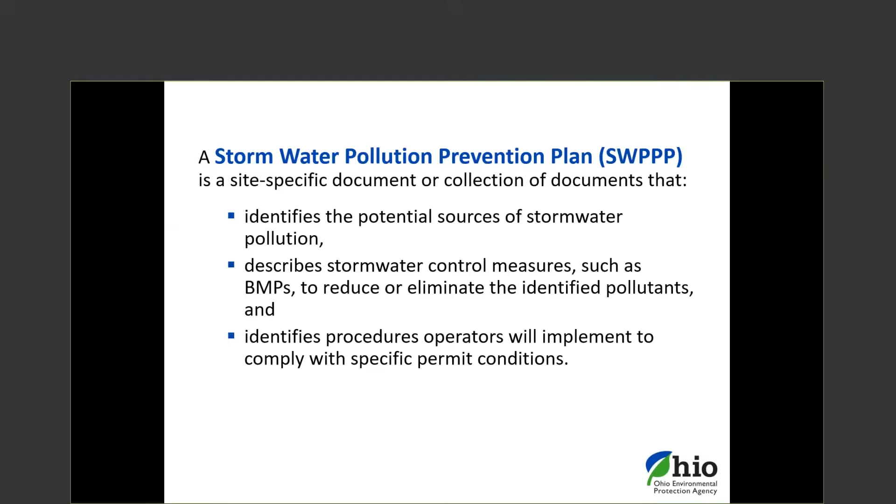But what I want to talk about today is a little bit more detail and think a little bit further about a SWPPP. And it can be a lot more than just that. A SWPPP is a couple of items here. A communication tool, maybe first and foremost. That can be a challenge because it's communicating many things to many folks, as we'll see. It's a thought process or an exercise. Okay, so there's a whole process that goes on through the development and eventually review of a SWPPP.

A SWPPP needs to be executable. It needs to be doable. It needs to relay the proper information so that the expectations can be met, costs can be estimated and accrued for properly by the contractor or the people doing the sediment and erosion control work on the project. Everybody knows who's responsible when throughout the project to save problems from occurring down the road during construction.

And the last two points here are sort of intertwined in that it's a very different, unique type of document. It's very complex. It includes a lot of different media: narrative, drawings, calculations, forms, etc. And not only is the SWPPP its own document, but it's very much integrated with other documents, especially the contract plans, drawings, and specifications for the project, but possibly other documents as well that all become integrated and maybe even borrow from each other.

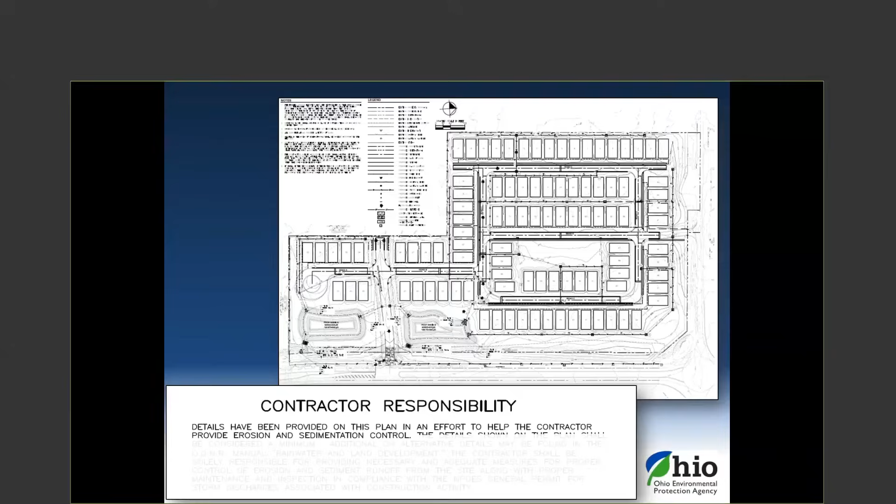So really, a SWPPP also is very specific and directive. It should really state exactly what is to be done, when, where, and how with regards to preventing those pollutant discharges. Now, that doesn't mean to say it's a finite document. It does change as construction things happen. There are certain unknowns.

But as a very simplistic example, there's not necessarily liability involved there; a contractor can't be told when to take the trash out, so to speak. But the SWPPP can identify that a dumpster is required on site and where it is to be located in an area that would not result in a discharge.

So again, that's sort of a simplistic example, but demonstrates where there's a little bit of direct direction that's required. But it also isn't really super specific in the sense that it assumes a lot of the liability for what happens on the job site.

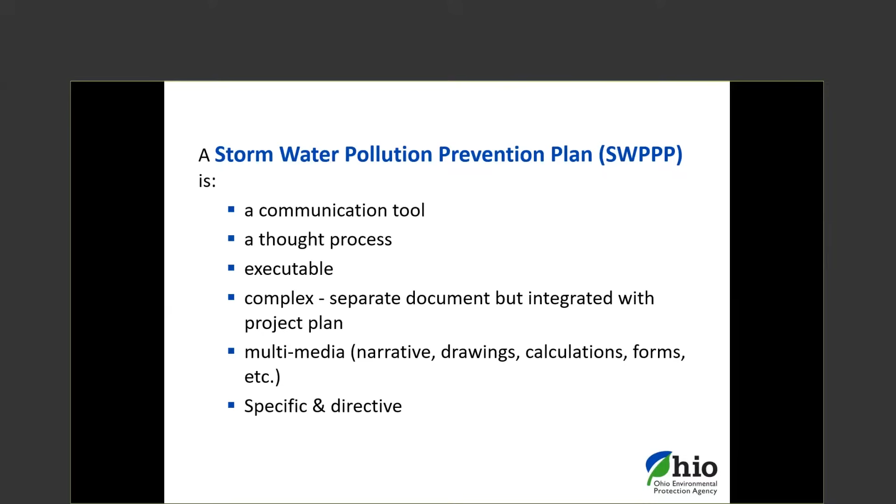So keeping those things in mind, the next step in the SWPPP is looking at the details of it, what goes into a SWPPP. And I don't want to spend a lot of time on this. All of the details are fairly clearly spelled out in the construction general permit. There's 19 pages of description of what goes into a SWPPP and how to do it in various levels of detail. It should be fairly clear as far as that goes.

But what I want to mention there is the fact that this is where it ties into the thought process. A lot of these items are listed as almost a reminder or a question as to bringing up topics that may or may not come into play as we develop a SWPPP and look at the potential discharges that occur. There are a lot of items in those 19 pages because this general permit is addressing all types of construction, various sizes and levels and degrees of projects. So it is very long and tedious.

There's a lot of little descriptions in there, but these items aren't necessarily anything in and of themselves if they're not used properly. Identifying the soil on a construction site doesn't help if we don't understand, is that soil erodible or resistant to erosion? What does all that mean when we look those characteristics up? Does it require me to do something different, more or less, than I would on any other given site? So that's why I like to think of it as a thought process.

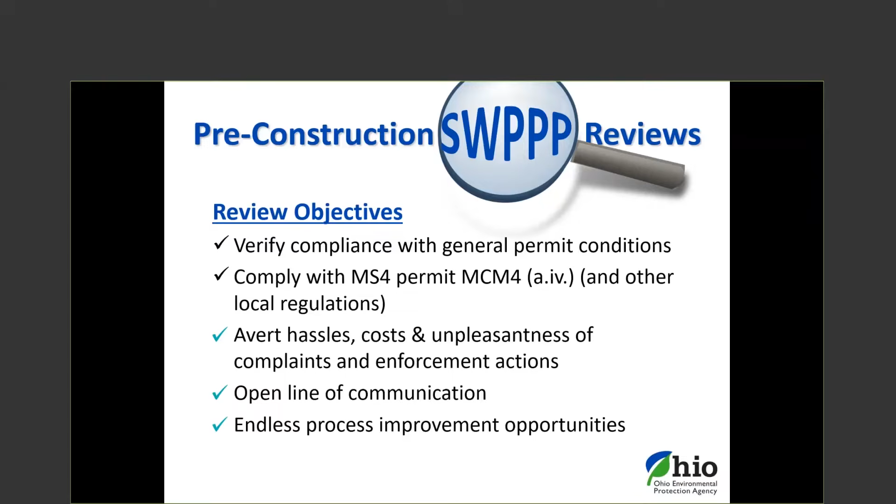Okay, so switching gears, let's talk a little bit about an approach to reviewing a SWPPP. No flow charts here, no step-by-step process if that's what you're looking for, just big picture thinking to set the stage for you to develop a review process of your own. And that's going to be flexible based on a number of things: local requirements, types of projects you're seeing, amount of projects you're seeing, staff, et cetera.

I think the first thing we need to get our heads around as a reviewer is that everything with a project needs to be done at a certain time, a certain sequence, under certain circumstances, schedules, et cetera. So we need to be thinking in terms of chronology here. Seasonally, too, things change. Obviously, weather, sediment, and erosion control concerns change along with the seasons. That means we need to look at that project in steps, where, as I mentioned earlier, most of our efforts go towards the final product, the end building. The SWPPP is really aimed at the construction process.

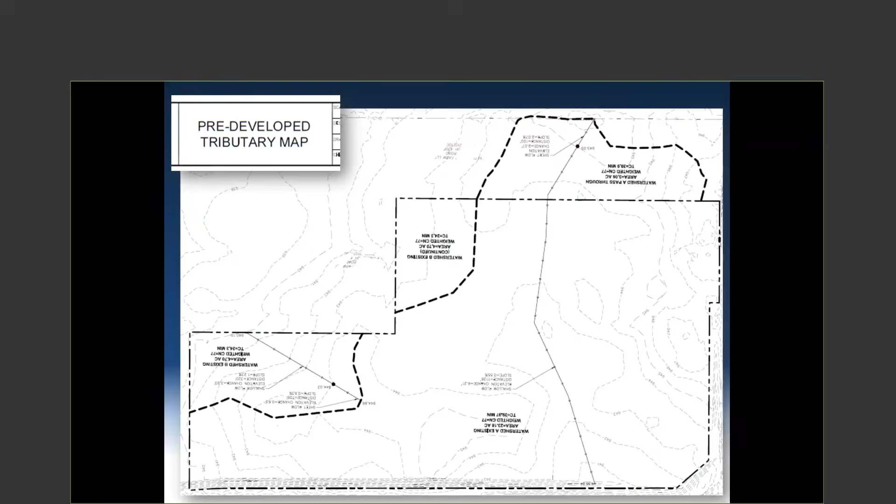So we need to know before the shovel even hits the ground, what does our site look like? What do we have there? That will help lead us into what controls we're probably going to need. So in this case, I've got an existing site map, very essential to me being able to plan a SWPPP, with existing drainage areas, existing conditions as far as streams and land cover go, assuming that most of this is going to be disturbed, graded, filled, cut, and altered in some way that's going to require SWPPP controls. I can determine where my drainage areas are, and that's going to lead to a lot of the placement of various practices.

So I should have a SWPPP plan for that setting, that initial phase where a lot of my sediment discharge is probably going to be at its worst, the clearing and grubbing phase, the rough grading phases of construction, as you see here.

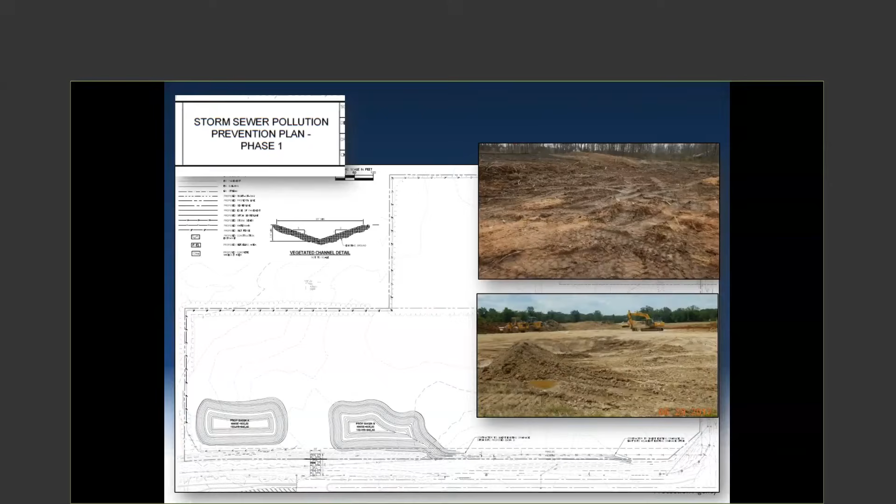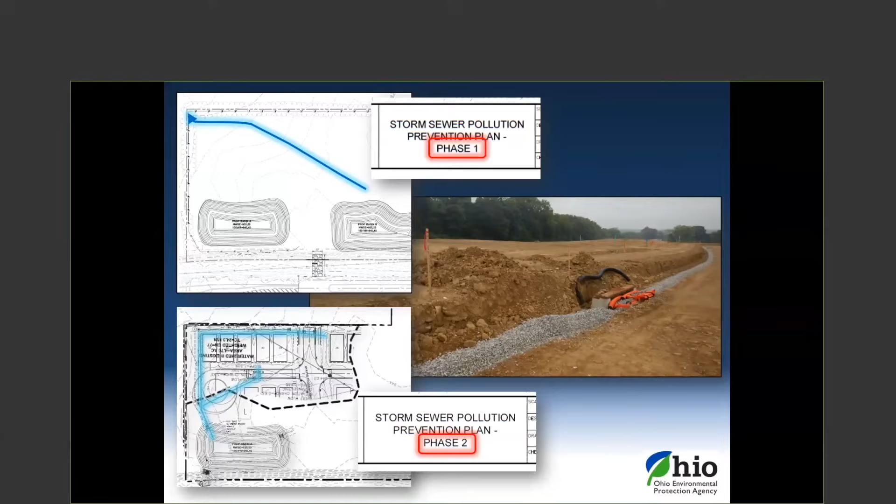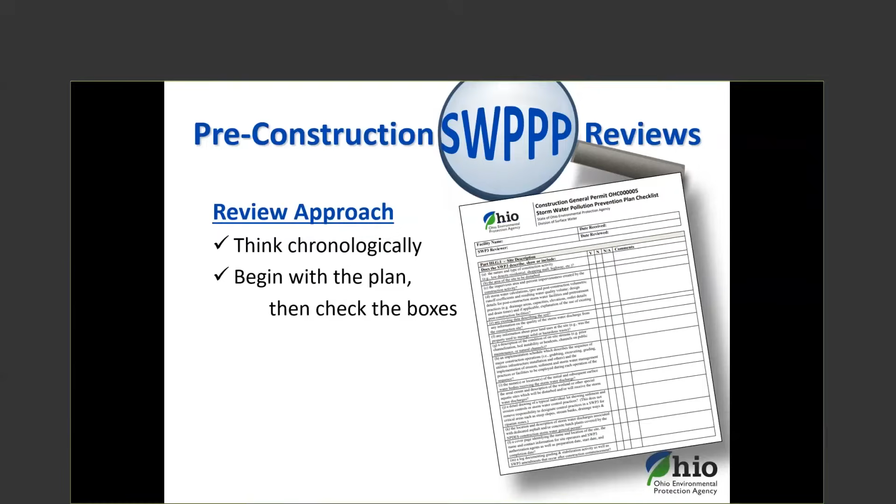I also need to be thinking about the plan, not start with the checklist. So we do have a checklist that really just cut and paste all the different criteria out of the permit to make your review easy. It's great for documenting the review and really a necessity for documenting that you've done the review, but it doesn't necessarily walk you through the project in the best manner. I like to begin with the actual plan itself.

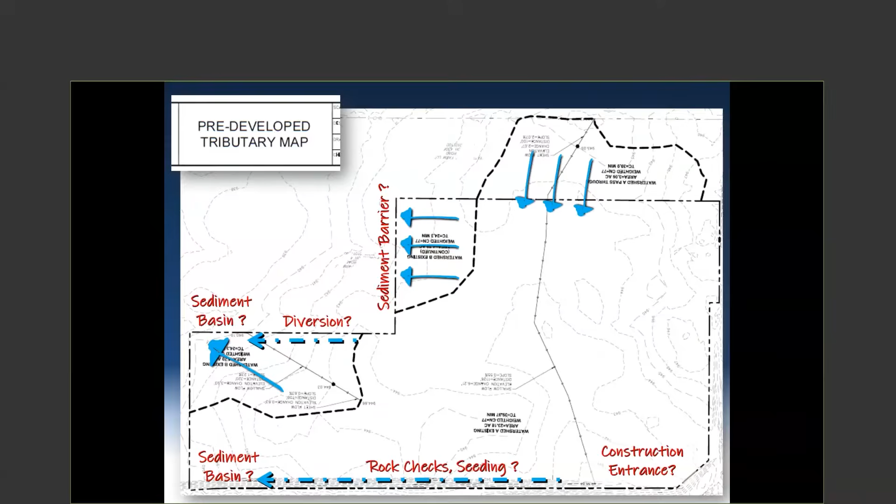So then I can go look into the SWPPP plan and start to see, okay, they do have basins right where I thought they would be. They do have perimeter controls right where I thought they would be. Maybe where I show the question mark, I thought there would be one and there's not. That forces me to ask more questions. Maybe it's not the right control.

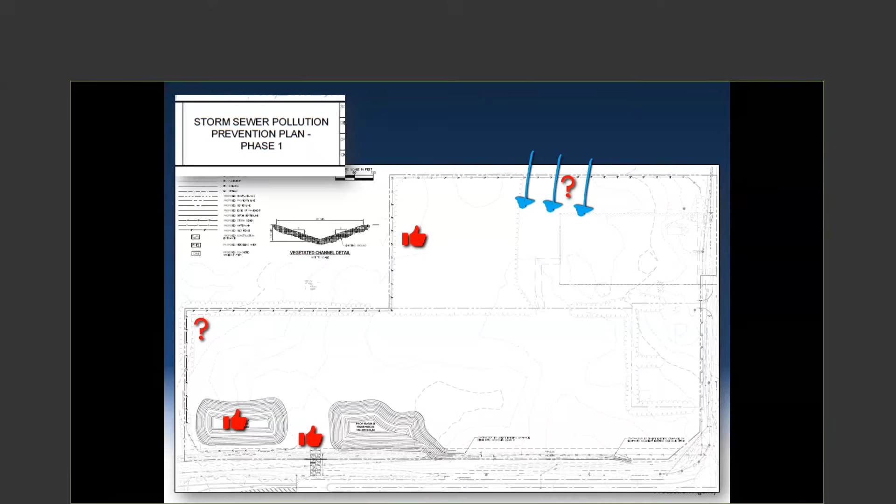Maybe it is. On the north side of the drawing, I've got off-site discharge coming on through a silt fence. Is that concentrated flow? Is that going to be a problem? May or may not be, but at least it identifies the question that may need to be asked to the developer to get more information.

We move to subsequent phases of the project. So now I've got infrastructure installed. I can start to look at those types of BMPs that go in. Inlets. I've got an inlet shown here in a backyard. Is this area going to be stabilized? Is it going to have inlet protection on it? Is it subject to a lot of sediment runoff from that area that may not be stabilized?

To the northeast, there's a street end for a stub right next to a catch basin shown there. That's a popular place to do things like concrete washouts. Is that going to be too close to that inlet? Is that going to be a problem? Are the washouts shown somewhere else on the plan?

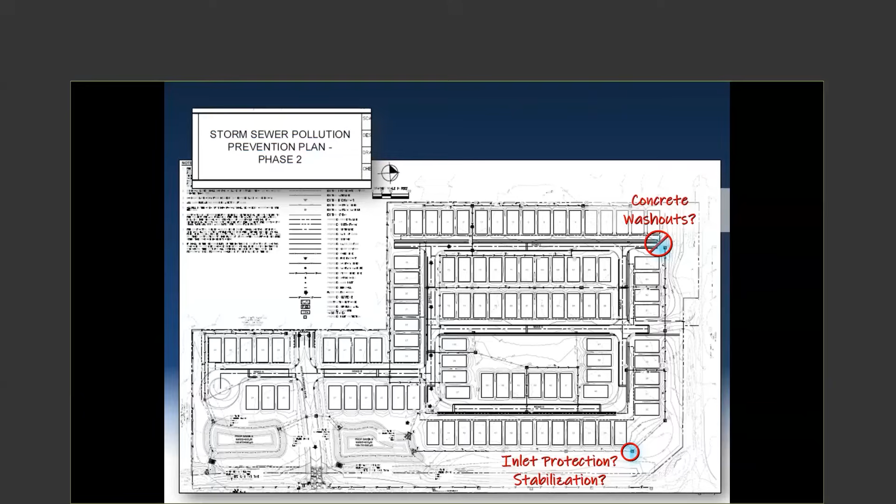Those are just questions to ask. It may or may not be answered in the plan. You may need to get more information. You may need to correct things. But those are the types of questions that you can start to ask when you're really looking at the plan and not simply checking off the boxes.

And then finally, the last segment of a lot of construction or residential construction, individual lots. Do I have a control plan for the individual lot? Probably a typical. Has it addressed all the issues? The one I've shown here, I've checked through the boxes, but it doesn't list a concrete washout basin. Will there be concrete work? There's likely to be some at some point.

Is it going to be a community basin? That goes kind of back to my previous question, makes it maybe more important that the location, if it's going to be communal at one of those street stubs, is not going to be a problem. It's going to be available for use throughout the project. So those are just good questions, or examples of questions that might come about during the review looking at the plans.

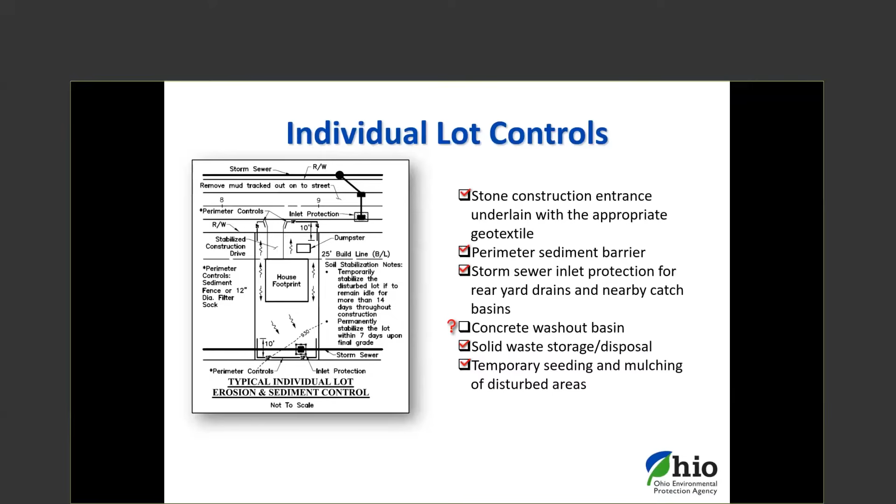I think the next topic is the BMPs themselves and identifying and understanding the design limitations that go with those. That really involves understanding how they work. To understand how they work will allow you to ask more critical questions of them, including how will it be built? Can it be built? You almost have to put your contractor hat on and understand how it's going to be installed. Does the plan give enough information for this to be installed correctly? We'll talk about that in a second.

I can begin to look at my detailed drawings, and a lot of these are probably typical or standard drawings that are cut and paste and don't take a lot of time, but others might because they're going to be different with every project that occurs.

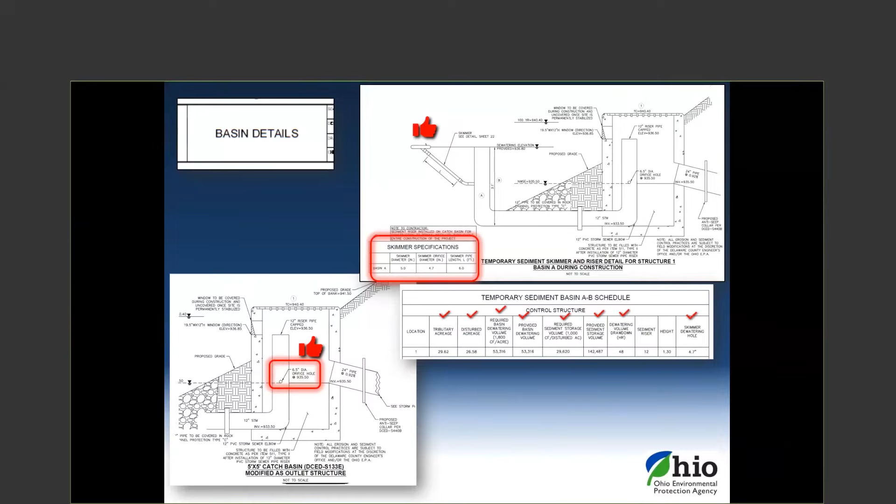Spreadsheets can be very helpful with facilitating that review. I encourage you to create them or borrow them. This is just a quick chart I put together, and I can't make it public yet because it's not been verified, but just to give you an example of what you can do, it's a quick check of skimmer designs: what size orifice would be needed to provide that 48-hour drawdown based on different drainage areas.

And I can quickly glance at this and go back one slide and look at my skimmer dewatering hole in the far right at 4.7 inches and my drainage area, tributary area, and my height of that dewatering zone, and quickly double check and say, oh, okay, 4.7 inches seems to work fine, or it's close enough for us for now. That can really facilitate a review.

Spreadsheet on the water quality volume. This is one for the redevelopment, famous equation 3 now in the permit, to be able to go through and check that and verify that the values are calculated properly. Can save you a lot of time.

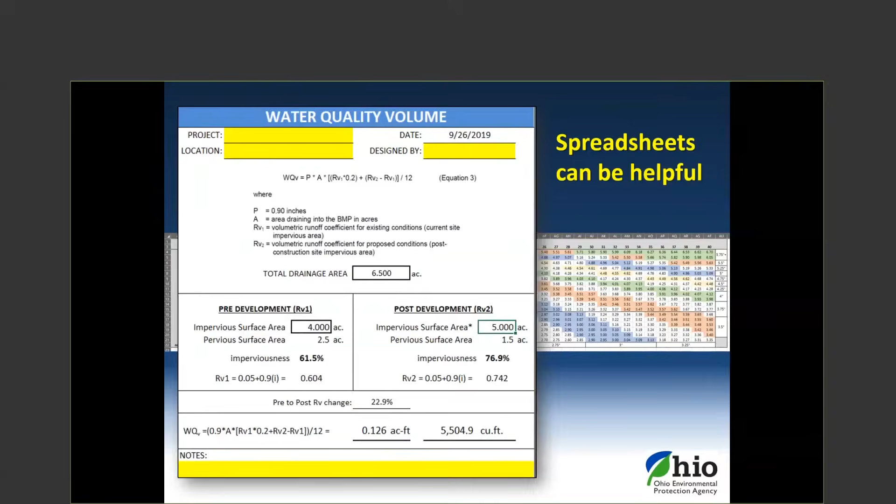Sometimes you need data to do that type of analysis. So if I look at our compliance checking tool, available to you on the website, if I were to look at verifying the drawdown requirements for a wet extended detention basin, I probably have an orifice size, I probably have elevations, but do I have enough information in the form of stage area, stage storage, to identify the volumes in that pond to create a drawdown? So I might need to, if possible, scale that off drawings, ask for that to be provided, or pull it out of calculations provided through software.

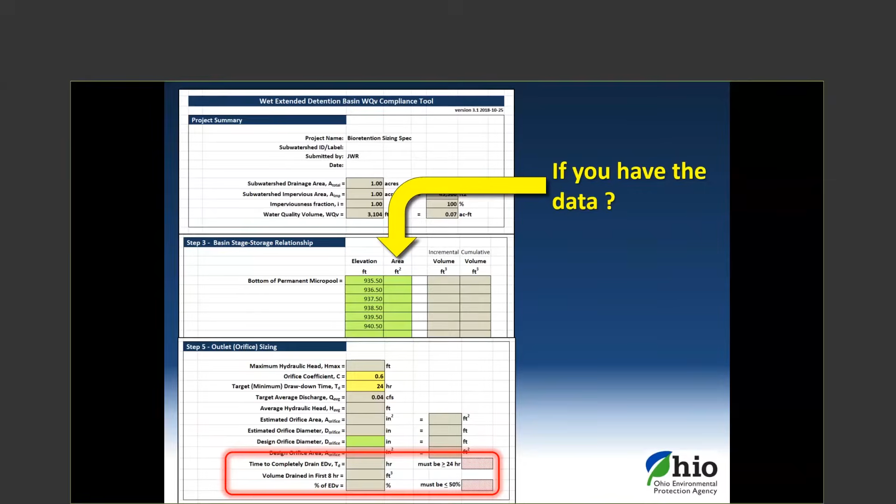Understanding the design helps me assess if a project will work. We have the fallback Rainwater and Land Development standards to go to, which are our state standards for how the design variables should be within all of the various practices as we see them best implemented. Sometimes there's flexibility there that might occur. We'll pick on bioretention. It's the easiest to do, but you look at a project here and I can start asking questions.

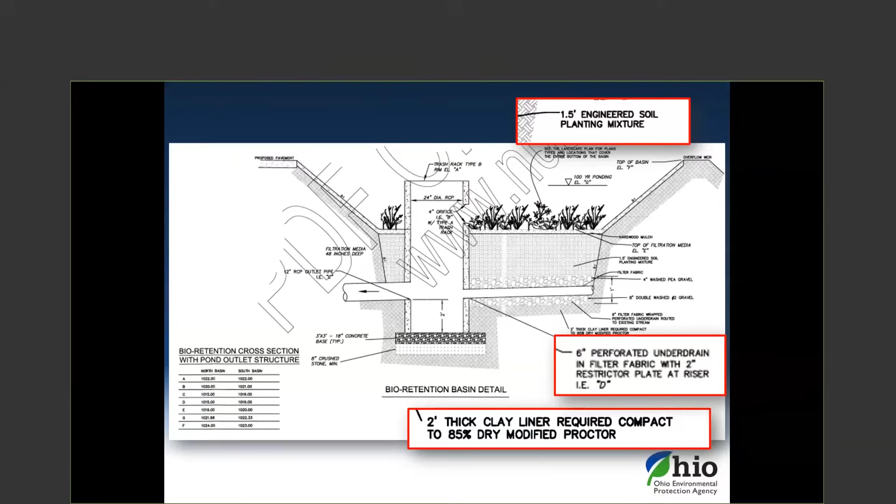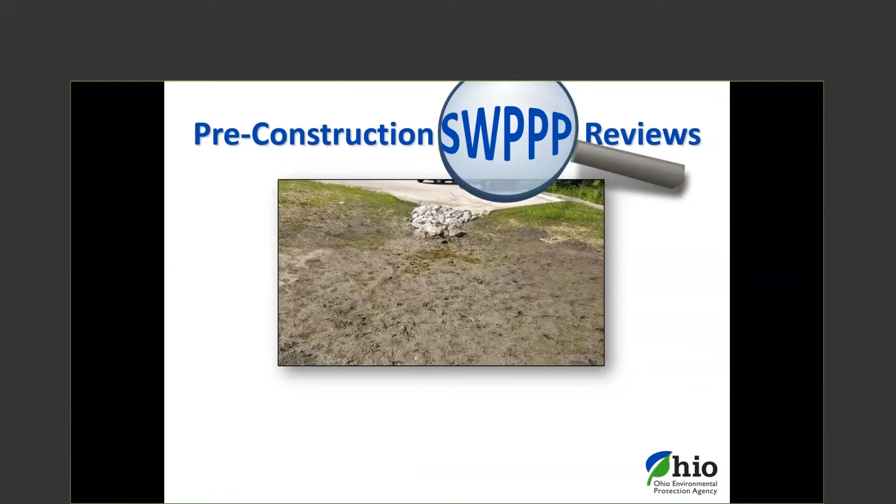A lot of the details are where, as they say, the devil lies. That is where things go wrong. Case in point, very recent discussions had with a local MS4 about a bioretention cell. If you can't tell, that's a bioretention cell. It's wet. It laid wet. They couldn't figure out why. They spent a lot of time and effort trying to understand where it failed or was failing, and ultimately came to the conclusion that it was because, as you see here, the contractor installed 8 feet of perforated pipe. They really needed 50 or 60.

That was a failure in communication. Not saying the contractor did anything wrong, or the engineer did anything wrong, but we clearly had a miscommunication in the fact that we should have had a couple $100 more of pipe in there to solve this problem that probably will cost a lot more to fix. So that's where the details come in, and we really need to assess from a, can this be built, and do I have the information to build it type of question.

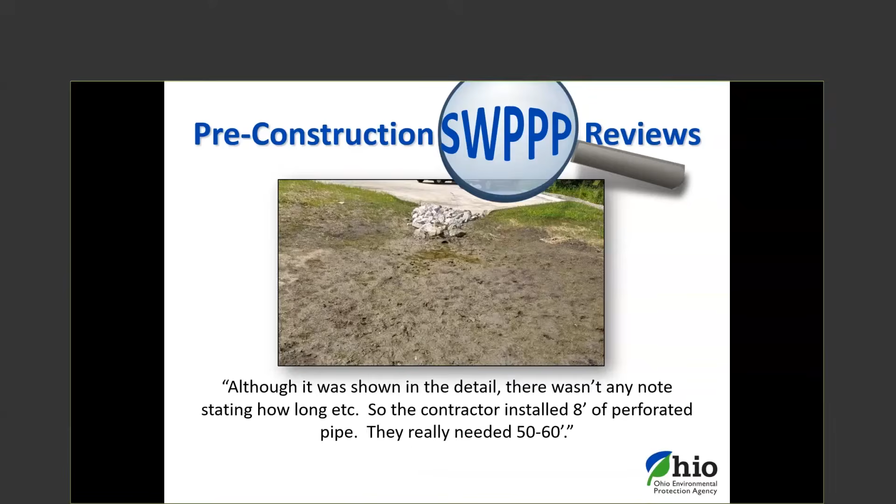So ask lots of good questions during the review. Have a list of them. Those questions can be something like, who's responsible for implementing the controls? If you look at the EPA version of their SWPPP template, it goes through and has that nice little formula or format that a lot of people use that has practice by practice. When is it going to be built? Who's responsible for it? Identify all that information. Those are good questions you could ask.

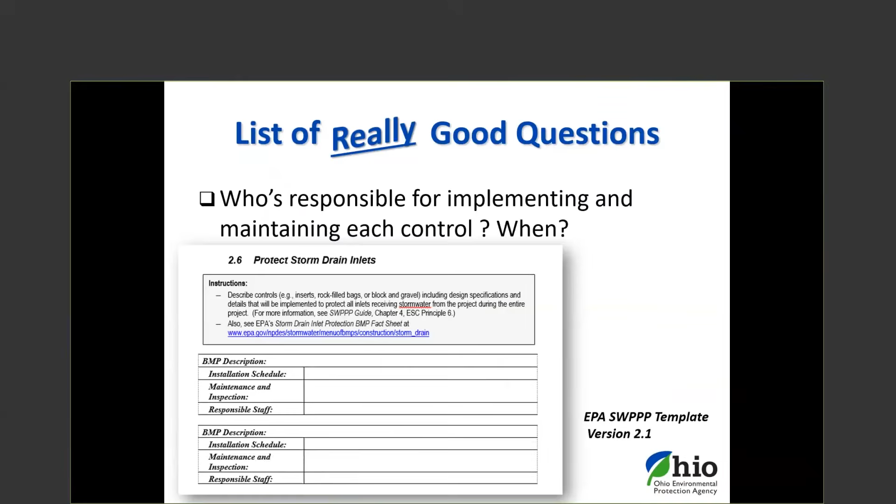You might say, are there contingencies for various times a year? Here's a SWPPP that says fine grading. Okay, we're going to do our final grading and permanent seeding in December of 2020. Okay, what if the weather is not very conducive to permanent seeding in December this year? May or may not be. It may be snow covered. It may be frozen. Well, we're going to do repair work in August. Okay, that's going to be 9 months from now, September. Those are questions of timing.

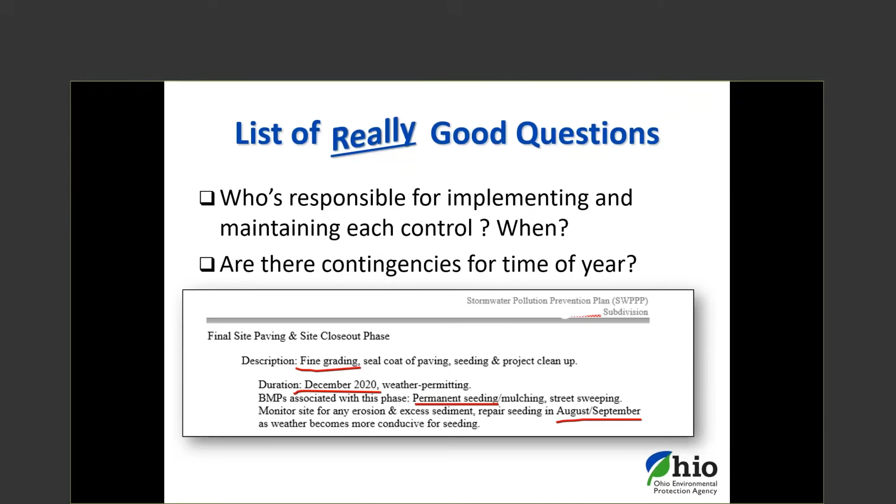And I understand construction is variable, and it may not be as specific as work will start on August 1st of 2020. But those are obvious questions that we can ask that can be addressed in the SWPPP. When will post-construction controls be operational within a project? This is your list, so that's all I've got for you, but you'll have to add to it as you gain experience and review projects and come across issues that you can start to develop to ask really good questions during the review process.

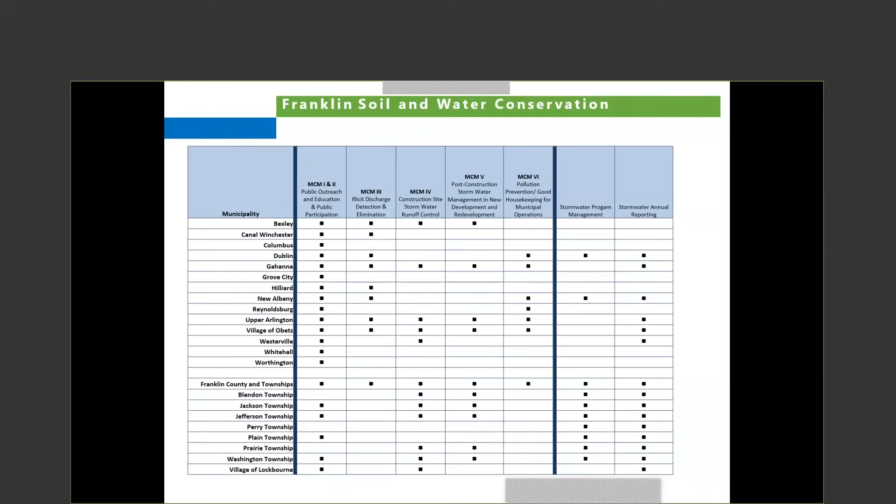We also have within the county 17 townships that we work with in unincorporated Franklin County. 7 of those have their own zoning. And we usually have our enforcement capabilities through zoning compliance. So it's very important that we have those rules in place. The townships have their rules in place as well, so they can support any enforcement that we need to be doing relative to NPDES.

So I've got a lot of different aspects. This comes up in plan reviews. I've got communities that span different permits, span different TMDL requirements. It just is almost an administrative practice more so than an implementation, because there's a lot of moving parts to this. So that's kind of a bit about the district.

Let's get into a little bit of how we actually do site inspections. And I threw pre-construction in here because it really is a part of that site inspection aspect. And I'm thinking more of the aspect from zoning and comprehensive plans and the overall sustainability of practices. If you're only doing site inspections within your community, you're missing the boat on a lot of conservation. This kind of goes back to our mission statement, where we're looking at preservation and conservation of those resources.

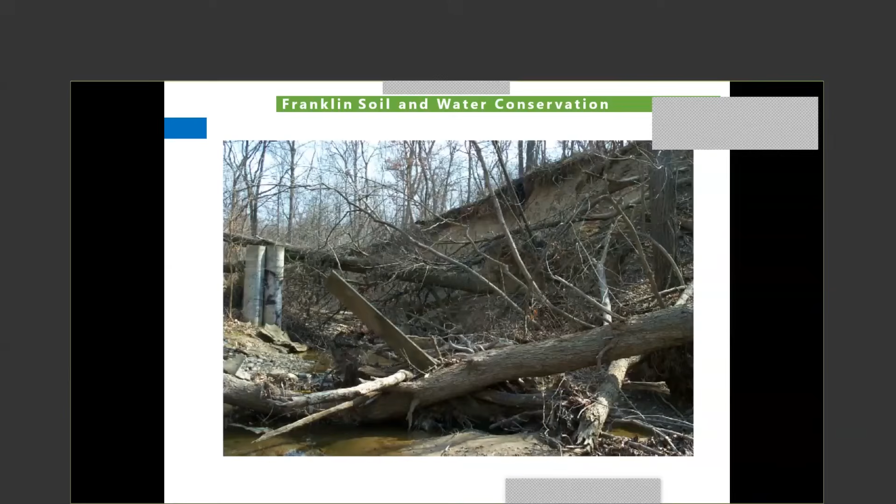I just want to give an example here. We deal a lot with urban stream erosion, and having setbacks, that's an important thing. I talk with a lot of communities, and they say, yeah, we have setbacks, we protect that, but they're generally standard width. They don't take into account steep slopes or wooded corridors, things of that nature. So it's very important that you build that in up front to have that kind of information there for them to use.

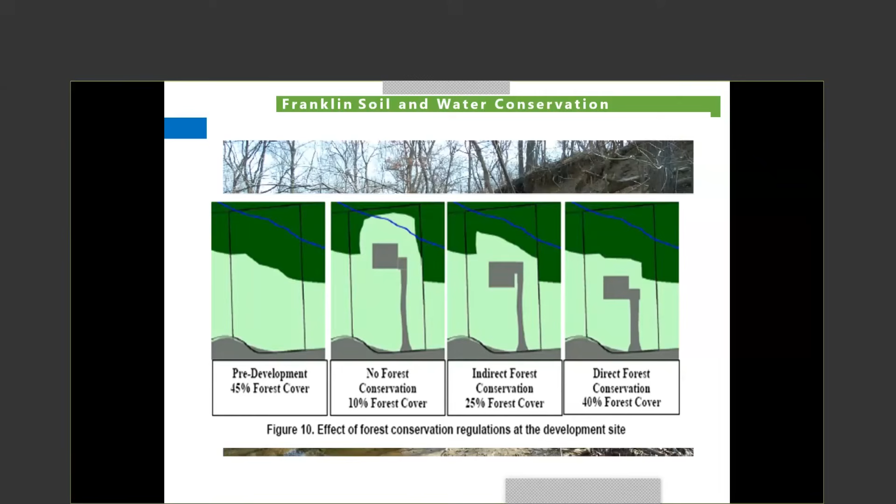And then if you're looking at a tree ordinance as well on top of that setback requirement, now you're looking at more of that 40% coverage. So that's just a way of building in site controls that ultimately become BMPs for sites.

Let's talk a little bit about plan reviews. So technical review committees, we have these here in Franklin County. I sit on several communities' technical review boards, and the county's as well. They're really a great thing. They bring the applicant together along with the technical agencies that are making comments, and you can really sit down and talk about things. And this is where you can also get those upfront items and not just see the construction plans. So this is giving you consistent plan submittals, both in the review and the comments.

And what I've heard from developers is, it gives you a reliable process and a time frame that they can rely on. They're not being called back for comments 3 and 4 times in the process. You're not hearing new comments from a new reviewer. It gets done all at once. Everybody sits and understands what the process is and how long it's going to take, and you get that more reliable process in place.

Checklists, you saw some of those with Justin's presentation. I think they're great. Having that checklist for items that you look at, that's just a quick snapshot of the ones that we use for either plan reviews or SWPPP reviews. A short one-pager; a lot of those things are more in-depth if you get into them, like checking the calculations. But once you look at that and have those check boxes marked, you've got a consistency there amongst plan reviewers. And you also get those comments all in place and ready to go.

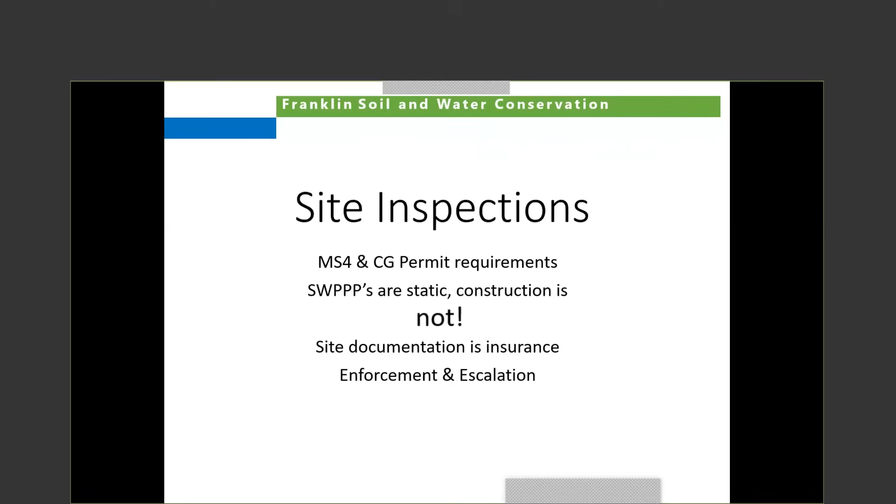So, and silos, we deal with a lot of silos, even within our permit partners.

I have economic development and planning that handles the zoning, and the county drainage engineer. They work with a lot of the sites in taking over control of those, particularly under the petition ditch process. And then we do a lot of the inspections and enforcement. So looking at those silos and bridging that can be problematic.

Local zoning, again, those silos, breaking those down between local township zoning. We have this within our permit as well. The difference between the MS4 control and the local townships. And then, of course, contractors, too. When you're on a site, they may have a site contractor for sediment erosion control, and they have to go through various levels to get to that control.

Post-construction, I will quickly talk to on post-construction. Looking at that long-term O&M and bonding and agreements in post-construction, that's something that's required by the MS4 permit. But know how you get to those and know what kind of agreements there are. Know when that bonding is released. The district does not control the bonding, the engineers do, and we have different punch-out lists that might need to be met before that post-construction is ready.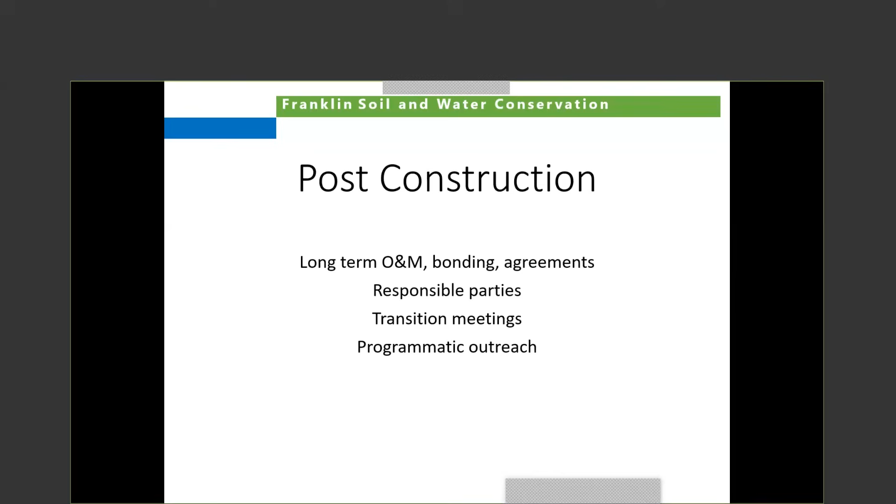so that they understand what that entails, what that long-term management is, and then have programmatic outreach that's going to talk to this in the long term, whether that's brochures you can mail out, mailings that go out annually, or something like that within your MS4 that's going to help get that information out and keep these systems running in the long term.